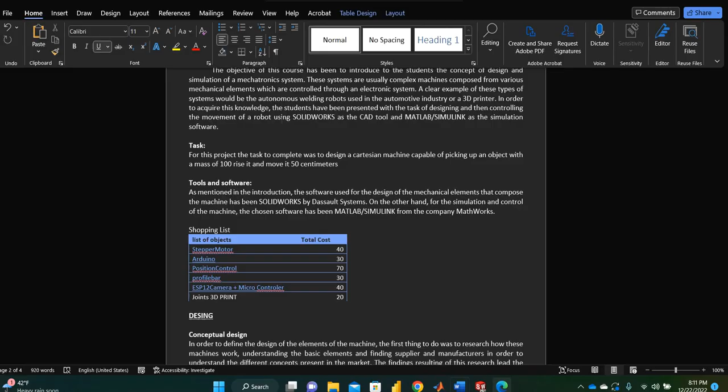Finally, we have for position detection of objects in our field of view, machine object detection is probably the best. We've seen it used before. And this camera with the ESP12 camera, I think, is the best one. They're cheap, like 2 euros each. No wonder everyone likes object detection. So, I put 40 here, but it's finally the joints and the casing which we would need, and the aluminum profile bars. That was 30 euros. So I think 200 euros, 250 euros is all you would need.

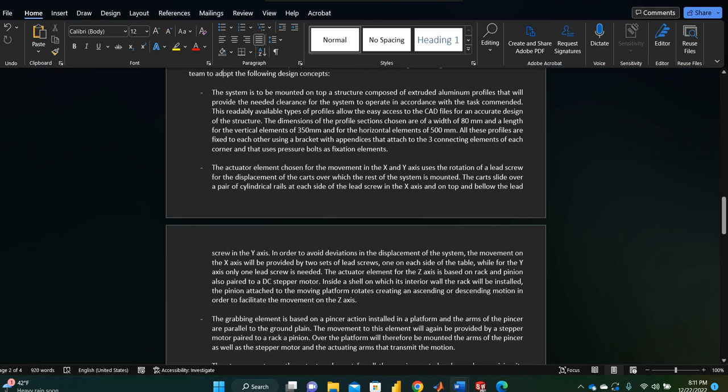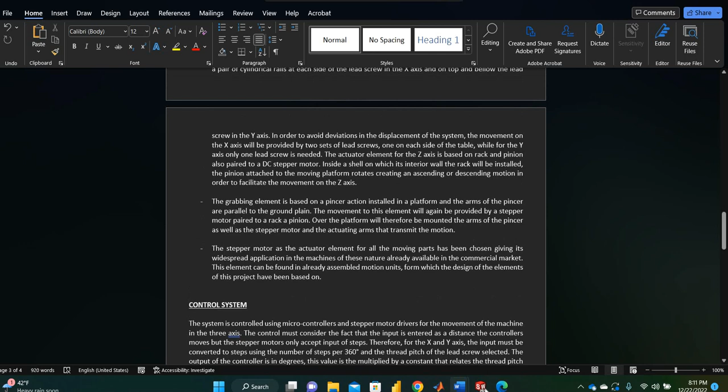So we did a lot of research on how these machines work. Obviously, we come from different backgrounds. We looked at the CAD models. A couple of things stood out to us. We're going to separate this into three elements. So the three elements we're going to discuss is the plant, the stepper motor, and the controller, and how we put this all under control.

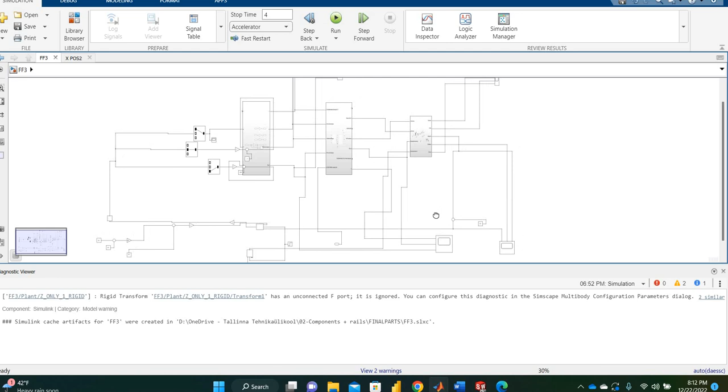You can see that this looks like a PID control system because it used to be. We had the PID control and the transfer function used to be here and it used to be here. You'll see why we took it out, but we did have it under PID control in Simulink. The real world obviously is a little more complicated in that way.

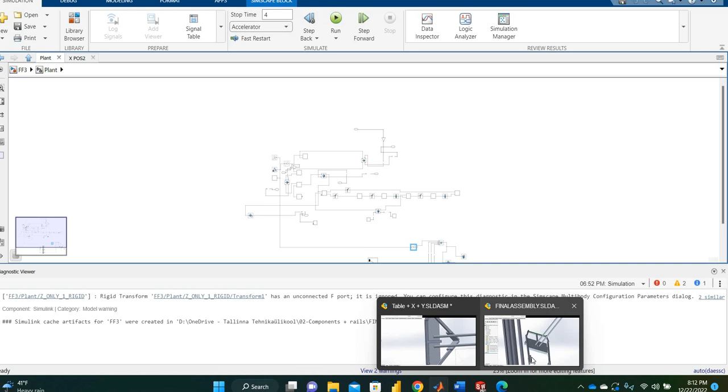So let's go step one. Let's look at our plant. So this is our plant in Simulink. It used to be much more complicated. We simplified it, and I will show it here on SolidWorks. It has three joints; it moves across the X and the Y plane. So let me float these around a little bit so I can play. So it moves on the X and Y here, and it moves up and down.

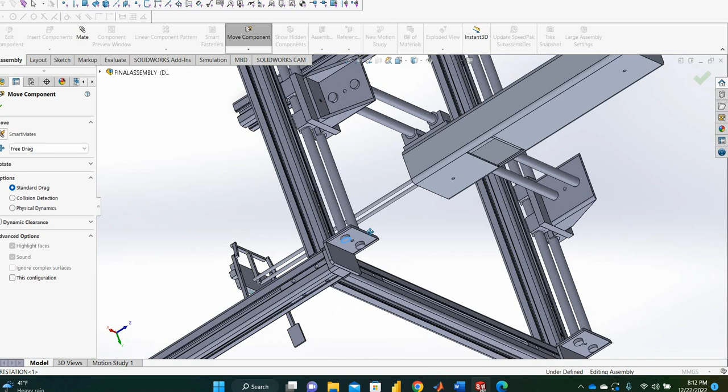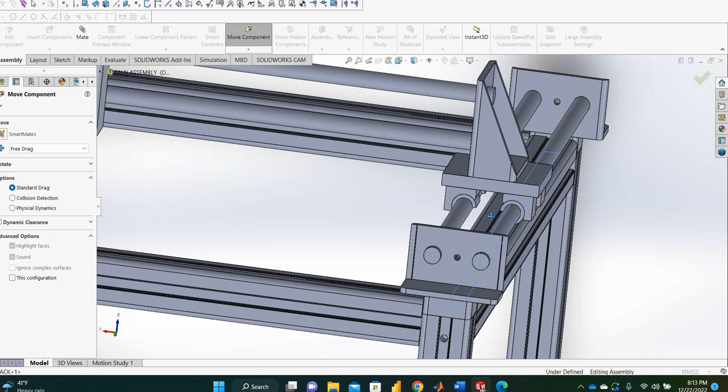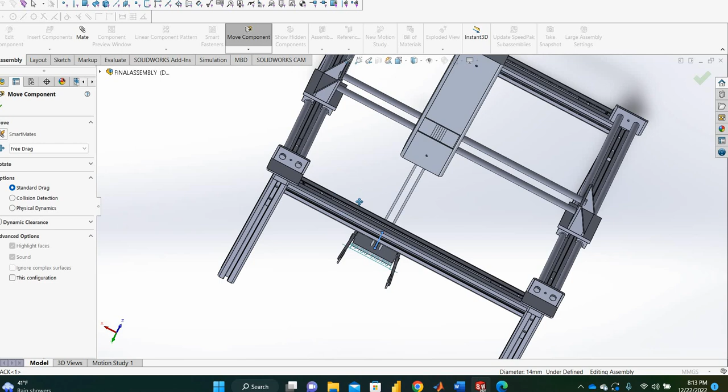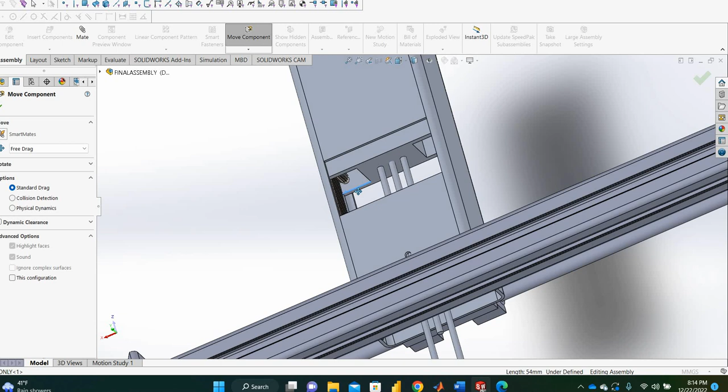And then finally, the stepper motors used to be in our machine. I actually have CAD models of the stepper motors that we would use. I took them out because they were killing my computer, but a stepper motor pulls two M5 rods for the X plane, a stepper motor rotates the Y plane rod, and then finally a stepper motor is sitting on top of this machine that contains the pincer. It sits on top and it moves two sets of rack and pinion to successfully move the machine up and down.

The main considerations now, this is moving a 1 kilogram object, so these stepper motors don't need to be too strong. The only one that needs to be strong is the one that holds the Z-plane, because it needs to produce enough holding torque to hold against this object falling. The holding torque that we decided on was for the 1 kilogram, so you have basically 10 newtons of force being worked on the machine. And to lift that, you would need about 20 newton centimeters. And so as long as you had a 40 newton centimeter just as a buffer, we felt like that was enough.

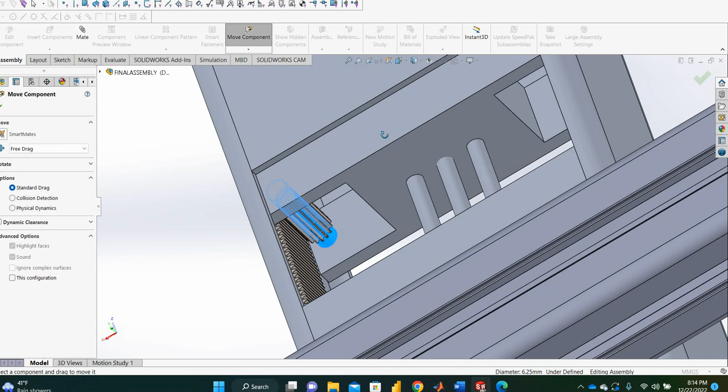So yeah, and it's moved all by stepper motors. Stepper motors are fun little things. They give you precise control, and they convert rotational motion of a DC motor into different steps, which allows for higher precision control. These motors revolve extremely fast. You can find them online, and they are extremely pivotal for any type of drones that fly, RC cars, and obviously for 3D printers, they're incredibly clutch.

Pun intended. That was a pun. No one's gonna understand this pun.

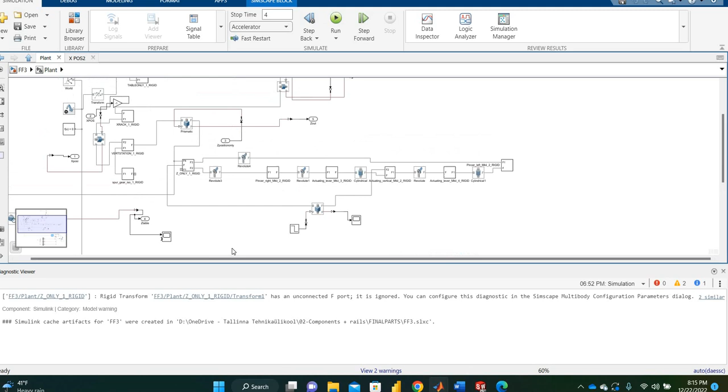Anyways, so here we are at the plant. We can look at the actuation of the stepper motors. So the stepper motors are running here. It's very interesting. So we have a stepper motor driver. The stepper motor drivers are providing us the parameter blocks in Simulink to be able to set the requirements.

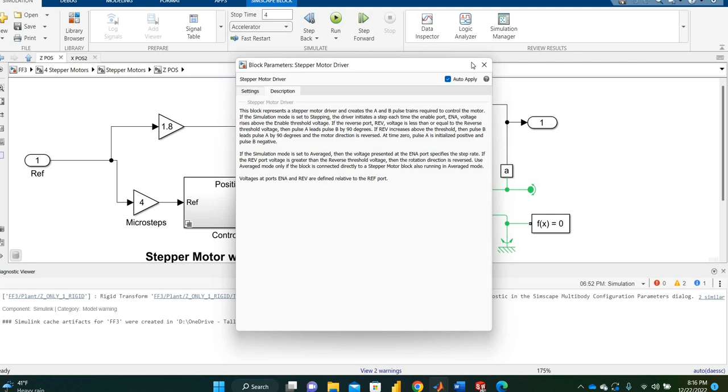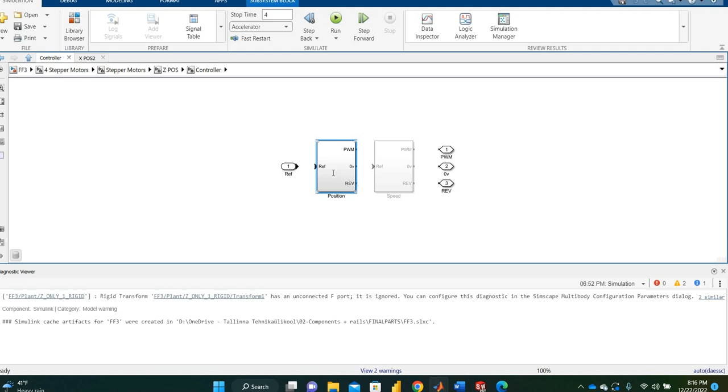Now in this stepper motor driver, we only had 10 volts. We think that the objects itself probably can do with 5, but I would assume a 12-volt system should be enough. 10 is what we modeled. 12 is good. 5 is minimum, is what I'm trying to say. What we like about this driver module that we picked up from Simulink is that it gives us position control. And this is why I don't have PID control.

If we have overshoot, which we can, someone could hit the table and we definitely would have overshoot. There's no way that these objects can move without moving the threads. And because of this, it's impossible. The position control drivers of the stepper motor will cause the overshoot to be corrected. You just have to watch out for oscillation.

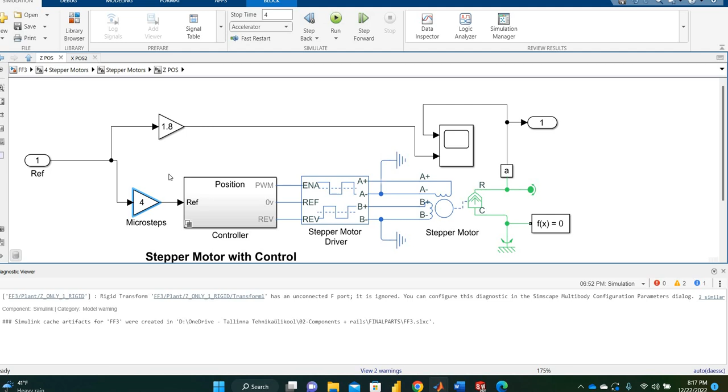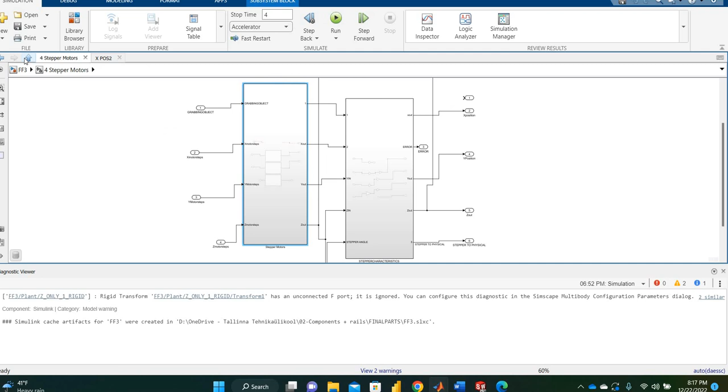There's a lot of resonance problems in stepper motors, and so you need microsteps. So basically, each single 1.8 degree turn of a stepper motor needs to correspond to 4 position steps of the stepper motor in order for the impact to take place. And so we do this by adding microsteps, and this helps bring down a lot of that oscillation that can mess up some of these systems. So that helps us with precision.

Finally, controllers. This is basically the job of translating the input signals from our machines. We get a Cartesian plane, and so we need to translate these into the position steps. And that's the beauty of a driver for stepper motors, is that I don't need to send commands to my stepper motors to hold a certain velocity. I'm actually just holding positions. Hence why the PID control has been removed.

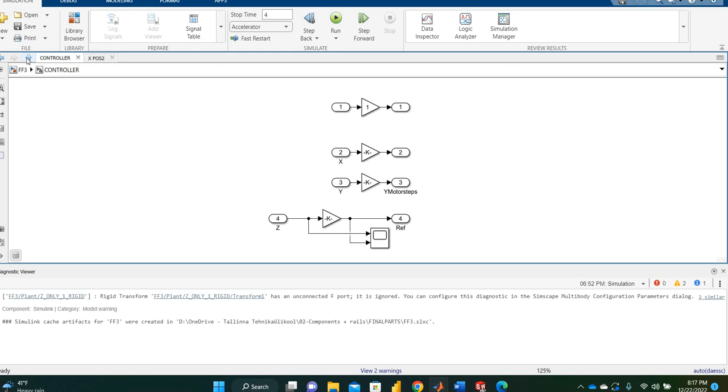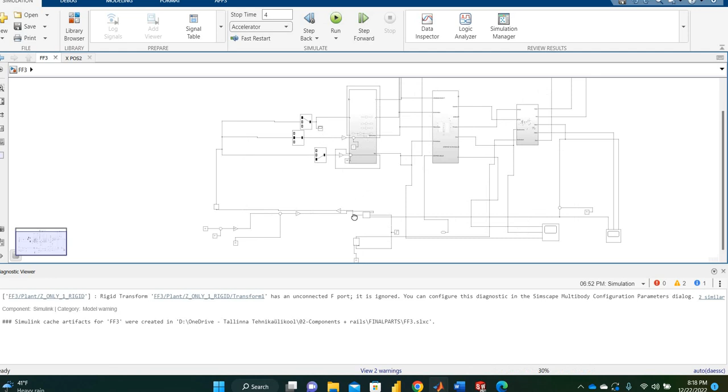But if I had a command to hold a certain velocity, I would probably add it. And you would add it by adding the transfer function right here, and then the PID control here, right here. But thankfully, not our problem today. So this is a simple model. We're going to show it move now. We're going to move it.

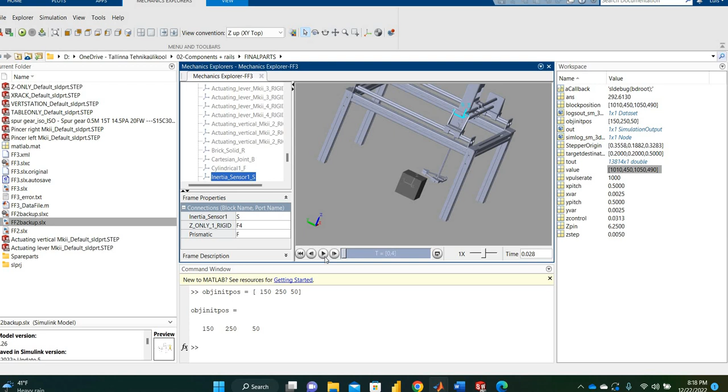So here is one of the first two jobs combined. So you can see that the object is placed right here, and you're going to see our object detect its position and open up its pincers and get into the appropriate latching position for the object.

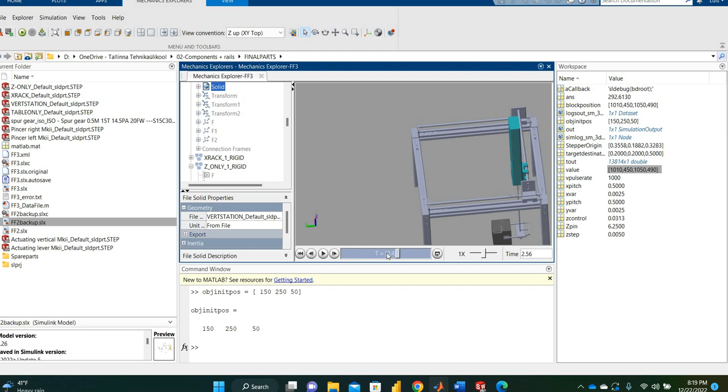One of the key elements to note is obviously I don't have a lot of time. I got kids, literally I got kids to feed, I got a job, and so the next steps here are to segment the work done by the lever and the actuation into different jobs. So for example, right now you can see that the lever opens up at this stage, but it could be better if we had the lever stepper motor opening up at a high rate.

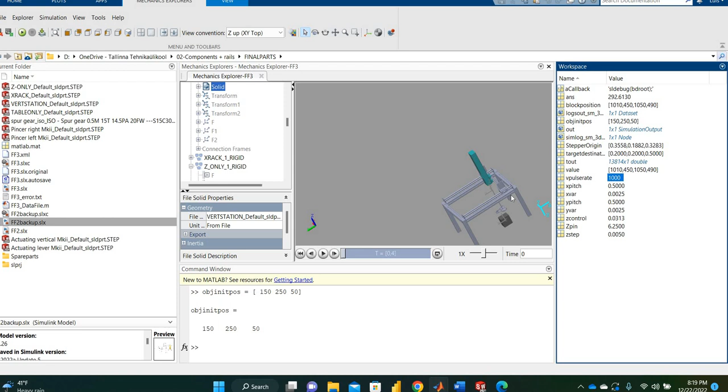So right now, this is one job because we did not create a simulation time. But the next step here is to program this object to lift, return to home, which is a high position, find the objects in the X and Y plane and lower and then grab. But essentially, these are all the jobs in one.

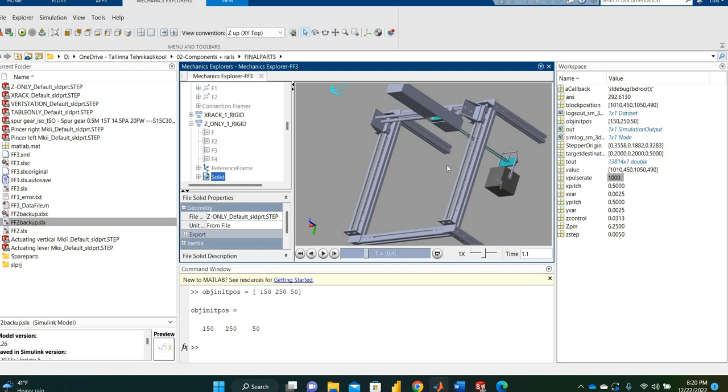So how do you make sure you picked up the object? Well, the ESP cameras that we discussed can make sure that the object's center of mass is moving. Having object detection is useful because I can identify the object being moved and I can identify the center of mass of the object, which is the most critical element. The other considerations to have is to control that to make sure the object could come in. So I'll describe this in simplest terms: good, better, and best.

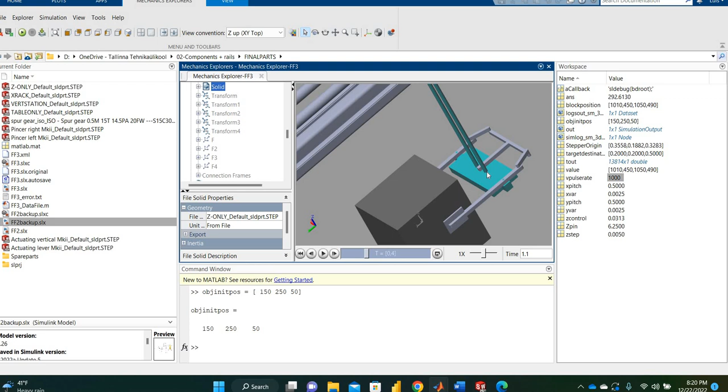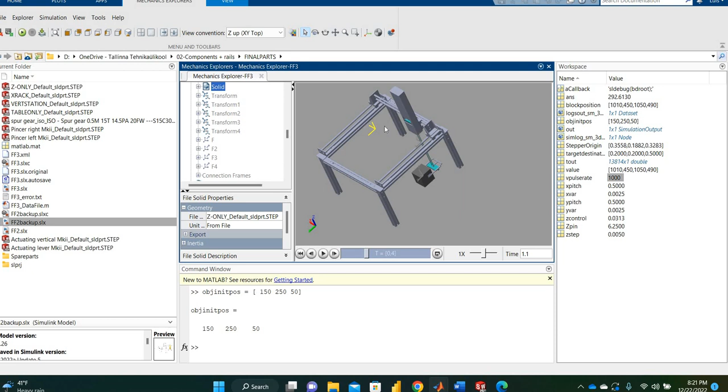So good would be to have the ESP32 cameras constantly monitoring the object, so you can see how the object is behaving under the external force of our machine. Better, you could do this and you could have a scale, and the scale should be able to measure the total weight of our system. So if our total net weight of our system is proportional to what we expect it to lift, then we're in the grabbing of the object. And best is, well, those are the two best ones right there. So yeah, you kind of identify the object that way. Yeah, that's all there is to it.

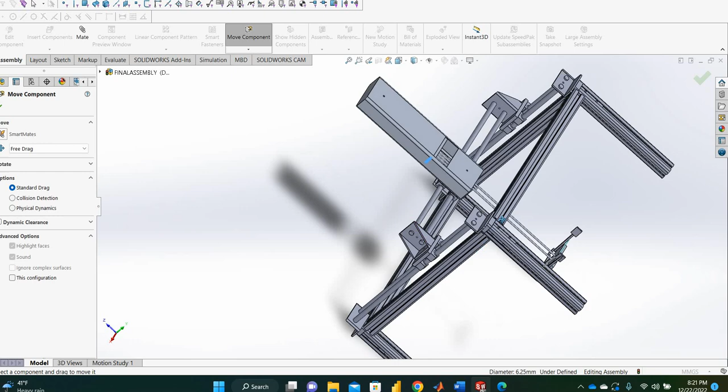So this is how we got in the project, and it was obviously a lot of fun for me, but it was an intense amount of work. It was not easy. The full assembly has got well over 40, 50 parts. You can see we've even threaded every single hole. We know this machine. I know this machine like the back of my hand, and I could build this machine.